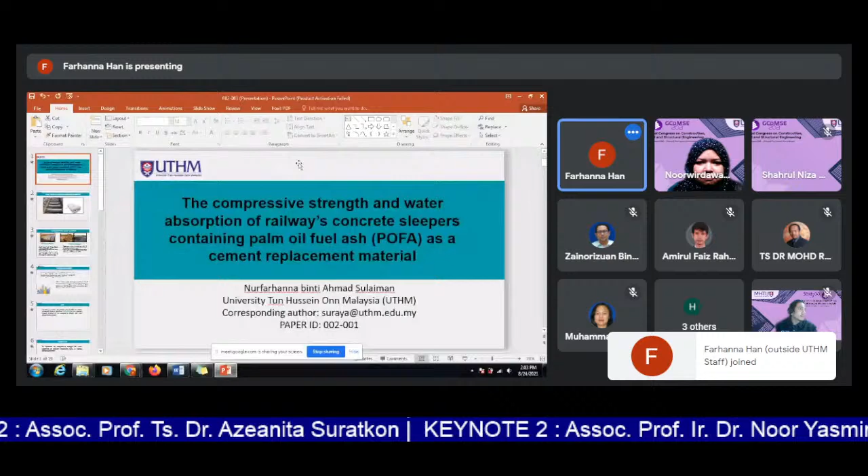Assalamualaikum and good evening, everyone. My name is Nur Farhana, I'm from UTHM, and my research title is the compressive strength and water absorption of railway concrete sleepers containing palm oil fuel ash (POFA) as a cement replacement material.

So basically, I will use palm oil waste, known as palm oil fuel ash, to produce railway concrete sleepers, and then test its performance in terms of compressive strength and water absorption.

First, let me introduce you to railway concrete sleepers. This is the transverse structure of a railway track. The function of the railway concrete sleeper is to distribute the load from the rail to the underlying layer.

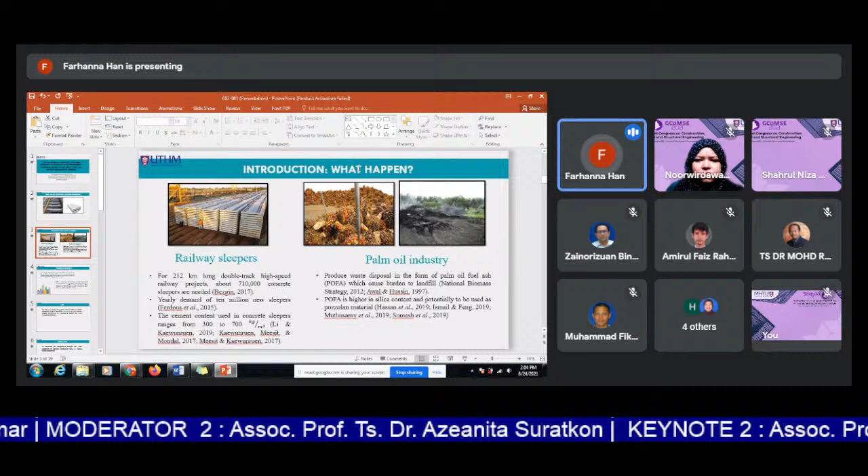As high-speed rail construction increases, demand for railway sleepers also increases. According to Bezgin in 2017, for a 212-kilometer long double-track high-speed railway project, about 710,000 concrete sleepers are needed, with a yearly demand of 10 million new sleepers.

Since railway sleepers require high strength concrete, a high content of cement is needed, ranging from 300 to 700 kg per m cube. This high cement consumption causes high CO2 emission, which can cause global warming, climate change, and other negative impacts to the environment.

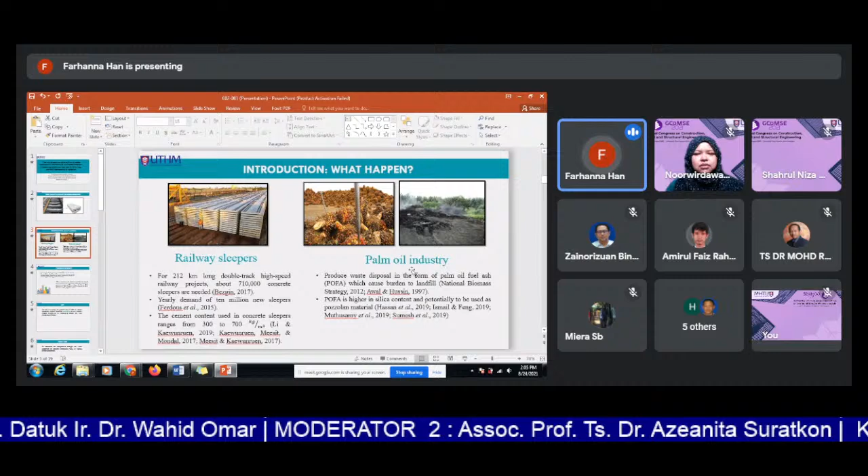Meanwhile, in the palm oil industry, in 2020 about 100 tons of palm oil fuel ash was produced and disposed to landfill. However, this POFA is high in silica content and has potential to be used as a pozzolan material. This is the problem statement for this research.

According to Kaewunruen, Sresakoolchai, and Peng in 2020, for Beijing-Shanghai high-speed rail construction, the greatest energy consumption was achieved by cement, representing about 42.69% of total energy, followed by gravel and steel bar.

POFA contains high silica content and can be used with cement to produce concrete. However, POFA cannot be used directly in raw form and requires further treatment such as grinding and heating to enhance its pozzolanic properties. The raw POFA collected directly from the factory may contain larger particle size and higher carbon content that can slow the pozzolanic reaction during hydration.

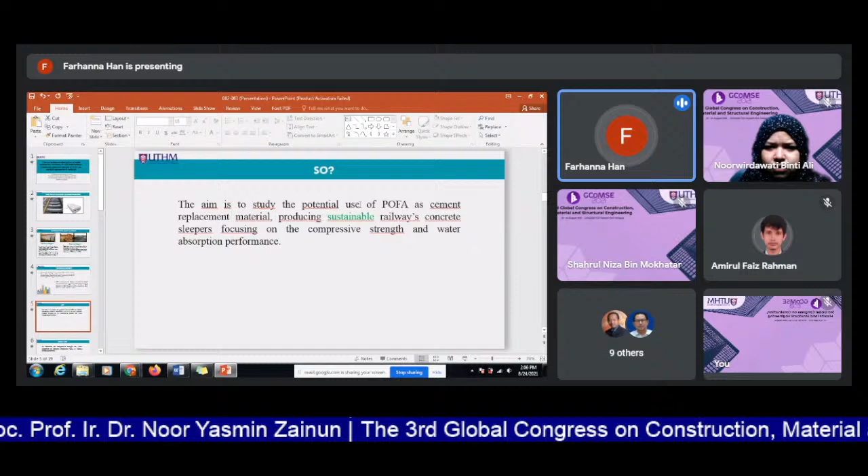The grinding process can reduce particle size and heating can lower the carbon content in POFA. The aim of my study is to study the potential use of POFA as a cement replacement material, producing sustainable railway concrete sleepers, focusing on compressive strength and water absorption performance.

The objective of my study is to determine the compressive strength and water absorption of concrete containing POFA at various percentage content.

This is the pozzolanic reaction of POFA. The major chemical component of OPC is calcium oxide, meanwhile POFA contains a large amount of silica content. During the hydration process, the silica in POFA reacts with the calcium hydroxide in cement to produce additional CSH, calcium silicate hydrate, improving the microstructure of the concrete and producing concrete with higher compressive strength.

This is the microstructure of the concrete: figure A is 0% POFA as control, without any POFA content, only plain concrete, and figure D is the concrete sample with 30% POFA. Both are after 28 days of curing age.

For figure A, the plain concrete, the CSH gel is difficult to retrieve, but for 30% POFA, the CSH gel is present in large amount, and the unreacted particles act as microfiller, filling voids and improving the microstructure of the concrete, producing a denser concrete, hence improving the compressive strength and water absorption of the concrete sample.

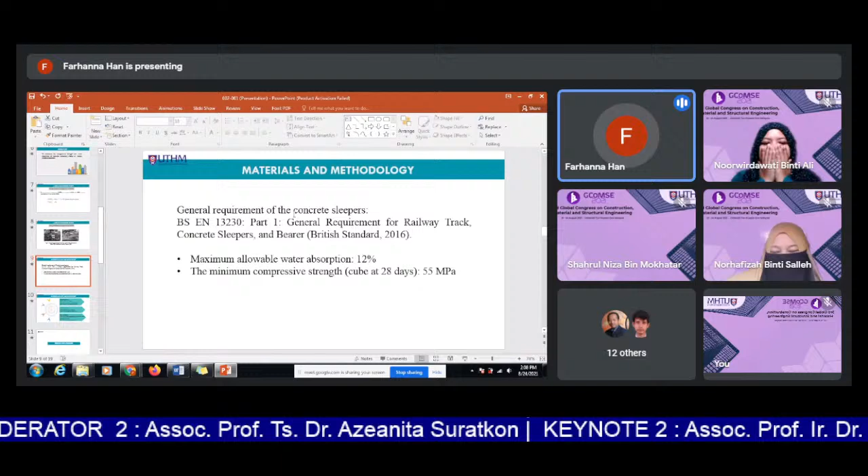For the general requirement of concrete sleepers, I refer to British Standard 13230, Part 1, general requirements for railway track concrete sleepers and bearer. The maximum allowable water absorption is 12%, and the minimum compressive strength for the cube at 28 days is 55 megapascal.

So this is my methodology. I prepared 3 mix designs using POFA as a cement replacement material at 0%, 20% and 40%. The control sample is 0%, without any POFA content.

For the POFA preparation, before use, I dry it in the oven at 105 degrees C for 24 hours, then sieve it to remove unwanted particles. For the water absorption test, I refer to British Standard 13230 and test water absorption using the hydrostatic weight method.

For the compressive strength test, I refer to British Standard 12390, and both tests are conducted at 7 and 28 days of curing age.

So this is my result and analysis. This is the result for the water absorption test versus the curing age at 7 and 28 days. We can see that as the curing age increases, the water absorption of the concrete sample reduces.

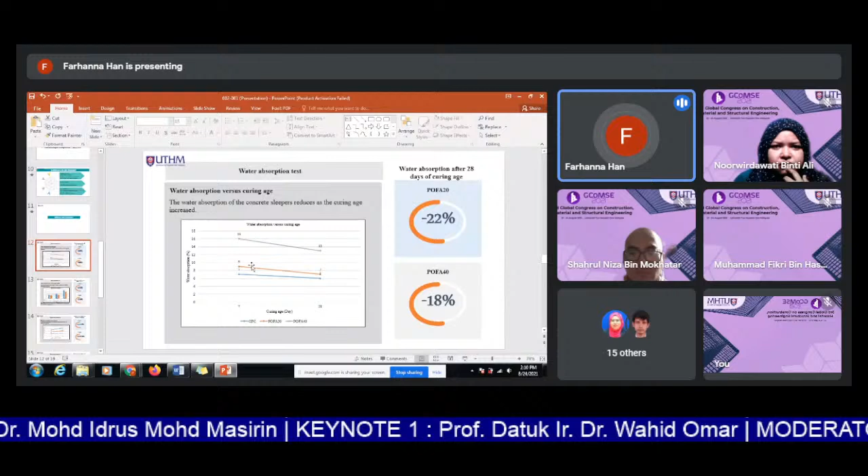For POFA 20, water absorption reduced by 22% from 7 to 28 days of curing age. For POFA 40, water absorption reduced by 18% from 7 to 28 days. This indicates that pozzolanic reaction occurs, which improves the microstructure of the sample along the curing age and fills the void, reducing the porosity of the concrete.

Although water absorption versus curing age reduced, as the percentage of POFA increases, the water absorption also increases. For 20% POFA, water absorption increased about 14%, and for POFA 40, water absorption increased by 54%. This may be due to the use of untreated POFA, which contains a higher amount of carbon and larger particles, which tend to absorb more water.

According to the British Standard, the maximum limit for water absorption is 12%. But since POFA 40 recorded a water absorption of 13%, POFA 40 cannot be used in railway operation. POFA 20 recorded a water absorption of 7%, so the optimum POFA content that can fulfill the water absorption requirement is 20%.

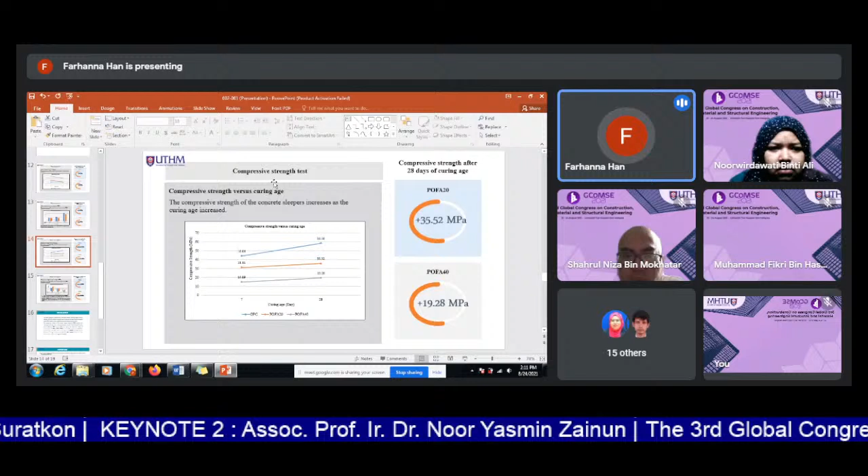Next, this is the result from the compressive strength test, the compressive strength versus curing age. As curing age increases, the compressive strength of the sample also increases.

For POFA 20, compressive strength increased by 35.52 megapascal from 7 to 28 days of curing age. For POFA 40, compressive strength improved by 19.28 megapascal along the curing age. This shows the pozzolanic reaction between POFA and cement along the curing age.

Although compressive strength improved along the curing age, as POFA content increased, the compressive strength of the sample reduced. Utilization of 20% POFA reduced the compressive strength by 22.72 megapascal compared to the control sample.

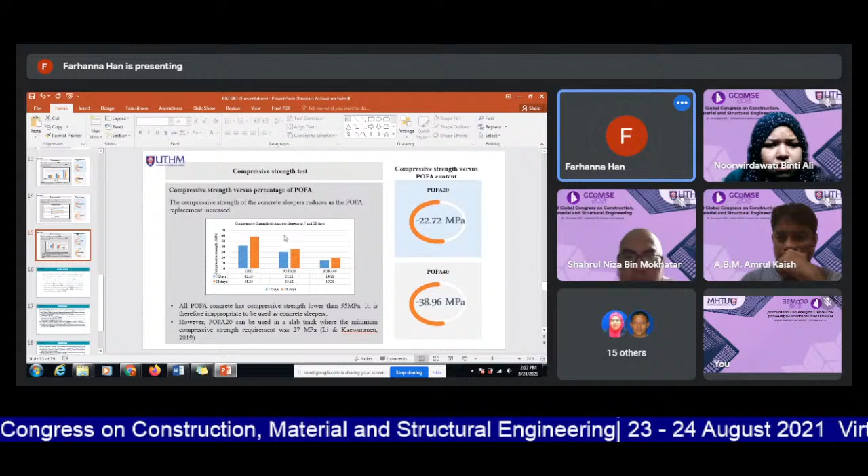For POFA 40, the compressive strength reduced by 38.96 megapascal compared to the control sample. This may be due to the use of untreated POFA, the higher amount of unburned carbon, and the larger particles of POFA, which reduce the pozzolanic reaction of the POFA.

All POFA concrete has compressive strength lower than 55 megapascal, so they cannot be used as concrete sleepers. However, POFA 20 recorded a compressive strength of 35.52 megapascal, so it can be used in slab track, where the minimum compressive strength required is 27 megapascal. So POFA 20 still can be used in railway track.

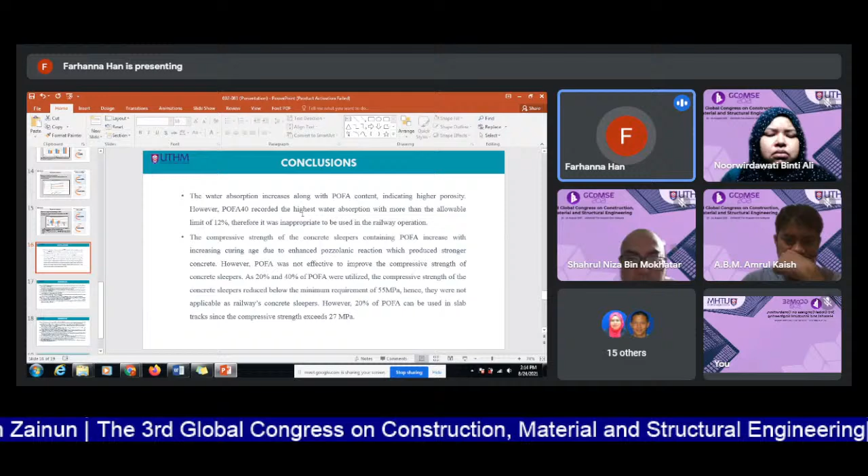As a conclusion, water absorption increased along with POFA content, indicating higher porosity. However, POFA 40 recorded the highest water absorption, more than the allowable limit of 12%, so it is not allowed to be used in railway operation. The compressive strength of concrete sleepers containing POFA increased with increasing curing age due to enhanced pozzolanic reaction, producing stronger concrete.

However, POFA was not effective in improving the compressive strength. The compressive strength reduced as the POFA content increased, but 20% of POFA can still be used as a slab track since its compressive strength is 27 megapascal.

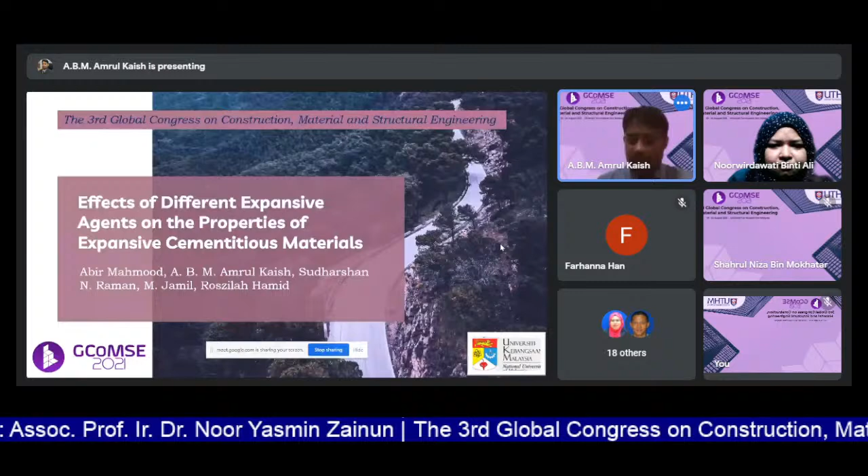So, expansive cementitious material - cement-based material, concrete, mortar, and other types - especially the early cracking, and also the aesthetic appearance for architectural concrete and all other types of concrete. So shrinkage is considered the major reason of curling, cracking, and debonding in such materials. The exposure to unsaturated environment by a cement-based system leads to drying shrinkage due to water evaporation. This causes early age shrinkage in the concrete structure, which also affects the properties of the concrete.

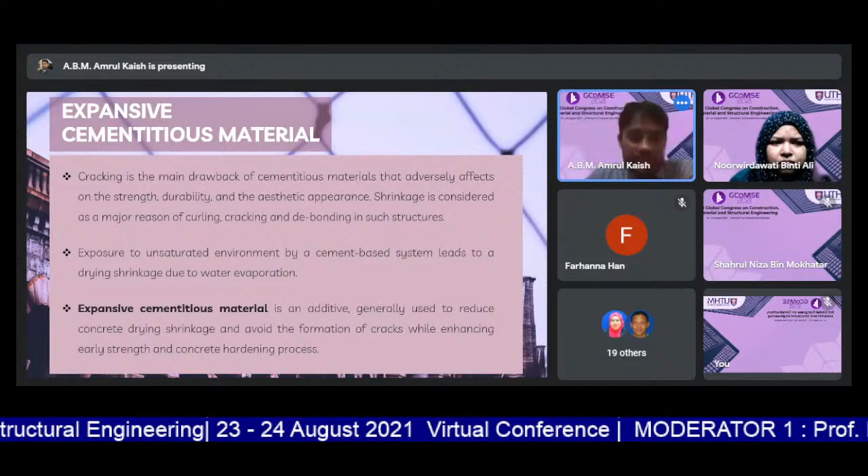So the expansive cementitious material is basically an additive that people normally use to compensate, reduce the drying shrinkage of the concrete, and also avoid the formation of cracking while enhancing the early strength and the concrete harden process. Okay, this is the principle - I don't want to go through the principle in detail. So what I just want to say is the use of expansive agent, but definitely it should be a controlled expansive agent, so it causes a little bit of expansion to compensate the early age shrinkage, like the drying shrinkage because of the evaporation of the concrete.

Okay, so basically in the market we have three types of expansive agents. The first one is calcium oxide based, magnesium oxide based, and also sulphoaluminate based type expansive agent.

So calcium oxide based expansive agent contains dead burnt calcium granules, which is actually calcium oxide. And the effect of this material is when it comes into contact with water, it creates calcium hydroxide, which is the portlandite crystal, and causes a little bit of expansion based on the doses. This one is commercially available, and the ACI 223 committee report also confirmed this type of expansive agent, which is actually Type G according to the ACI report.

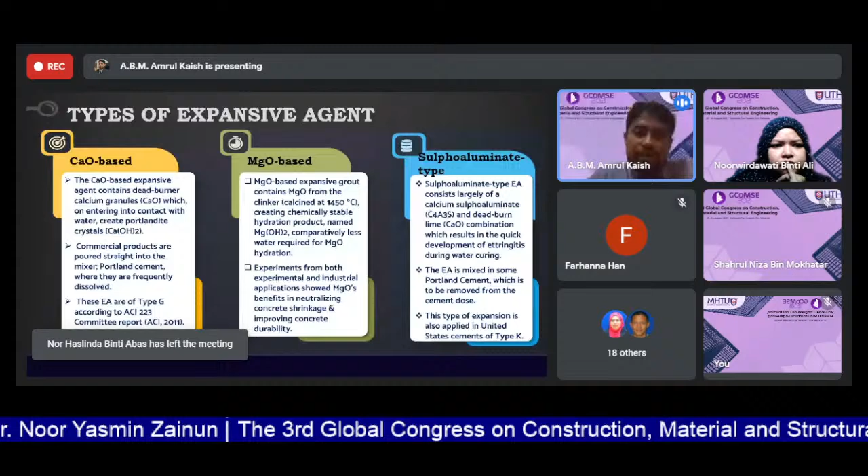Okay, then we have magnesium oxide from the clinker, which is calcined at 1450 degrees Celsius, creating the chemically stable hydration product, which is magnesium hydroxide. This one requires comparatively less water compared to calcium oxide based expansive agents.

The third and last one is the sulphoaluminate type. This one basically contains calcium sulphoaluminate and also lime, which is calcium oxide also. This combination results in the quick development of ettringite during water curing. So this type of expansive agent is mixed in some Portland cement, which is actually known as expansive cement, and also high early strength cement. This type of expansive cement is available in the US as well, and also in Europe.

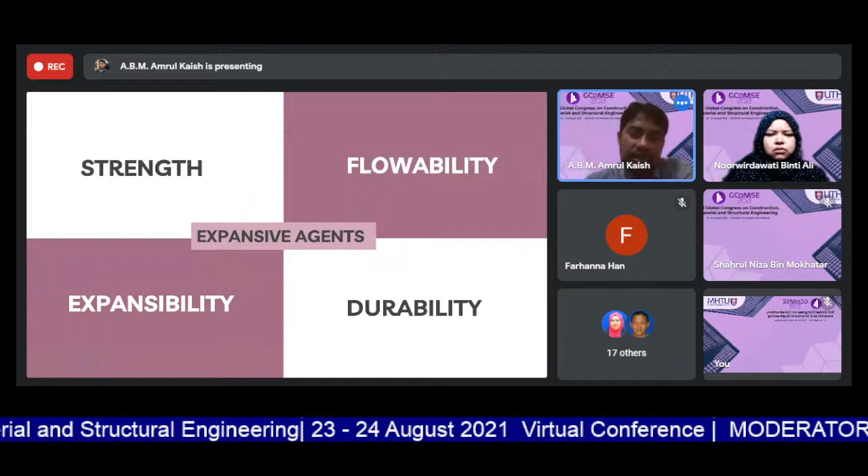Okay, basically I'm going to discuss these four types of effects of expansive agent in cementitious material, especially concrete and mortar. So let's start with the strength. For the calcium oxide based EA, which is expansive agent, a research study by some researchers from Italy identified that different amounts of calcium oxide based expansive agent don't have that much influence on the compressive strength value.

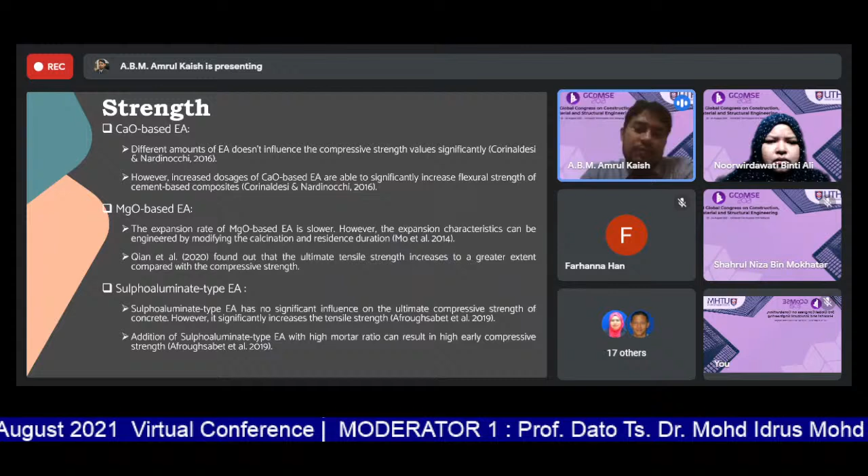However, increased doses of calcium oxide based EA are able to significantly increase the flexural strength of cement based composites, meaning fiber reinforced composites. There is almost no significant influence on compressive strength, but a significant increase in flexural strength. This is because of the partial pre-stressing effect due to the expansion in the microfibers. This is how the flexural strength of the cementitious composite increases due to the blending of expansive agents.

Then magnesium oxide based EA - the expansion rate of the magnesium oxide based EA is slower actually. However, the expansion characteristics can be engineered by modifying the calcination and residence duration. Another study found that the ultimate tensile strength increase is greater compared with the compressive strength. This is also due to the partial pre-stressing effect of the microfibers.

Then the sulfoaluminate based EA - this one has no significant influence on the ultimate compressive strength, but it has significant strength on the tensile strength, and also it results in a high early compressive strength if we use it with a high mortar ratio in the cementitious composites.

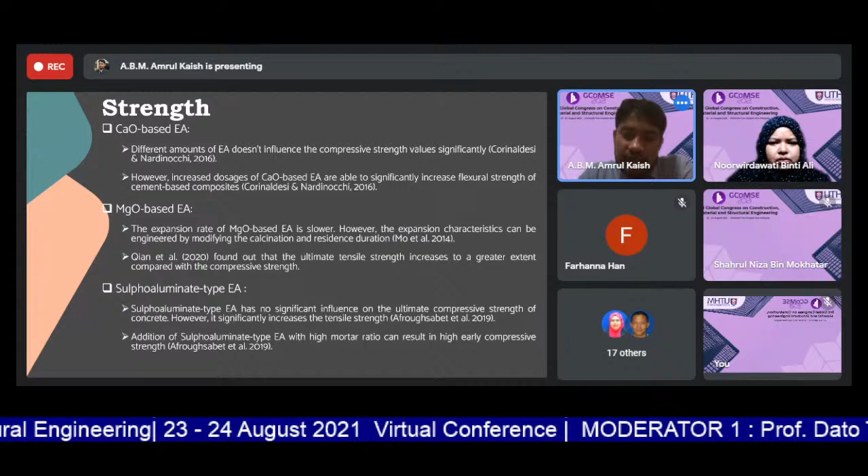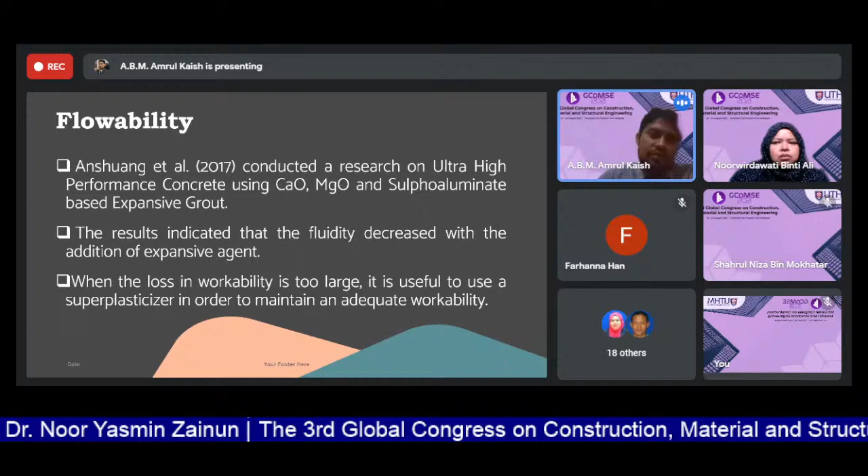Then with the flowability, all three types of expansive agent have an impact on the flowability. The result from one researcher indicated that fluidity decreases with the addition of expansive agent, because the expansive agent tries to expand and causes a decrease in fluidity. This is why the workability is reduced significantly. So it is advised to use superplasticizer when we use any kind of expansive agent, to create a balance between the flowability and expansibility.

In terms of expansibility, overall calcium oxide based expansive agent and magnesium oxide based expansive agent have very high expansibility compared to the sulfoaluminate type. So sulfoaluminate based expansive agent actually produces controlled expansion in concrete structures. Most researchers recommend using this type of expansive agent for controlled expansion.

And for durability, one study found that reinforced concrete with steel fiber and calcium oxide based expansive agent provided better improvement in the impermeability and durability of the concrete. According to Jiang et al., the use of magnesium oxide alone had little effect on the resistance to chloride penetration of the concrete. The combined effect of magnesium oxide and steel fibers was studied. Also, the use of calcium oxide based EA in hydraulic structures is less likely used in practice due to the lack of enough research.

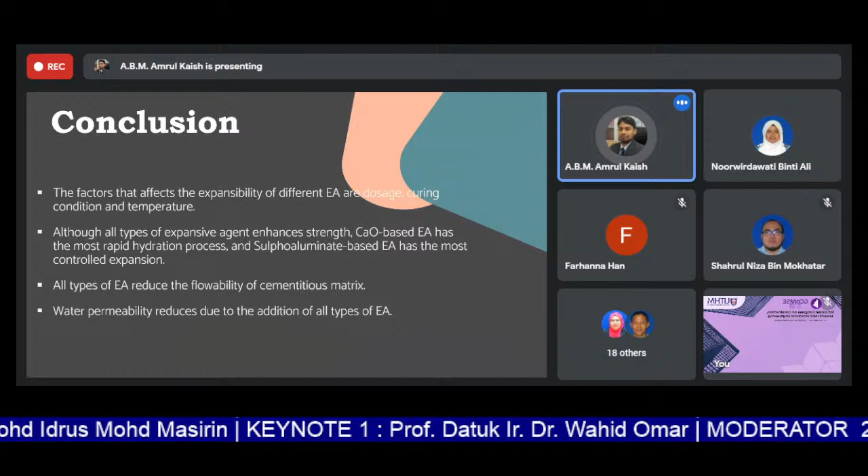In conclusion, the factors that affect the expansibility of different expansive agents are dose, curing condition, and temperature. Although all types of expansive agent enhance strength, calcium oxide based EA has the most rapid hydration process, and sulfoaluminate based EA has the most controlled expansion. So for high early strength, we can recommend calcium oxide based EA.

However, for controlled expansion, which is required for practical use in structures, we should go for sulfoaluminate based EA. All types of EA reduce the flowability of the cementitious matrix, so it is advised to use superplasticizer to compensate for this workability problem. Also, water permeability is reduced due to the addition of almost all types of EA, which is reported in the literature.

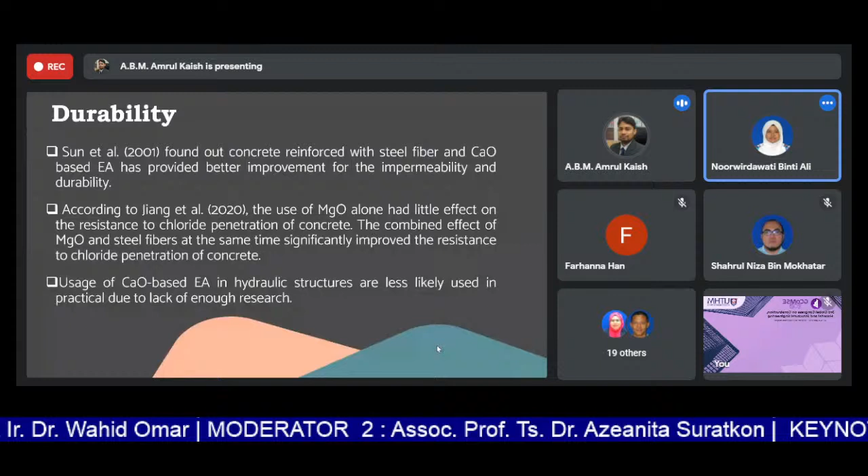Thank you for this question. Basically, the effect of fiber is different than the effect of any other additives. Fiber normally does not significantly affect the durability. However, additives significantly improve the durability. So what happened in this study was that magnesium oxide causes a little bit of expansion that reduces the porosity of the concrete, and this is why durability is affected, not because of the steel fiber.

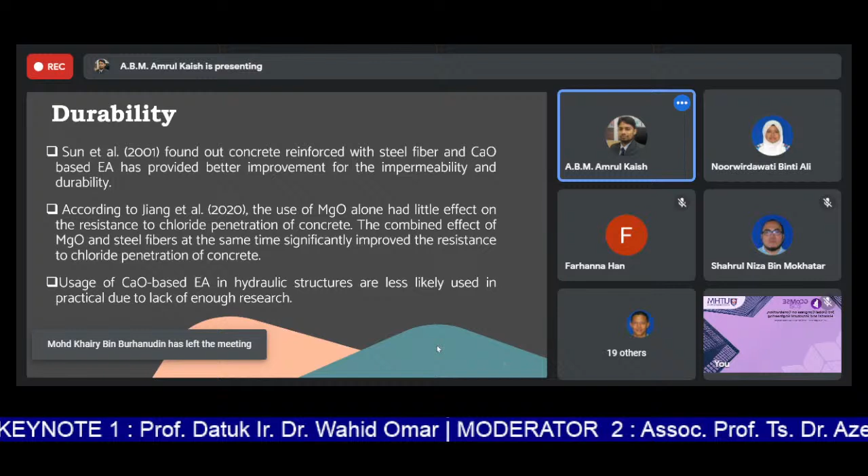But what is the effect of steel fiber here? Because magnesium oxide is causing an expansion, and magnesium oxide normally does not cause a controlled expansion, the steel fiber is there to control the rate of the expansion.

So it reduces, because of the expansion there will be no cracking due to the steel fiber. This is what steel fiber is doing here. But magnesium oxide causes the improvement in the porosity, and that is how the chloride ion penetration, and also any other ion penetration, will be reduced. So this is my explanation. I hope that's an okay answer to your question.

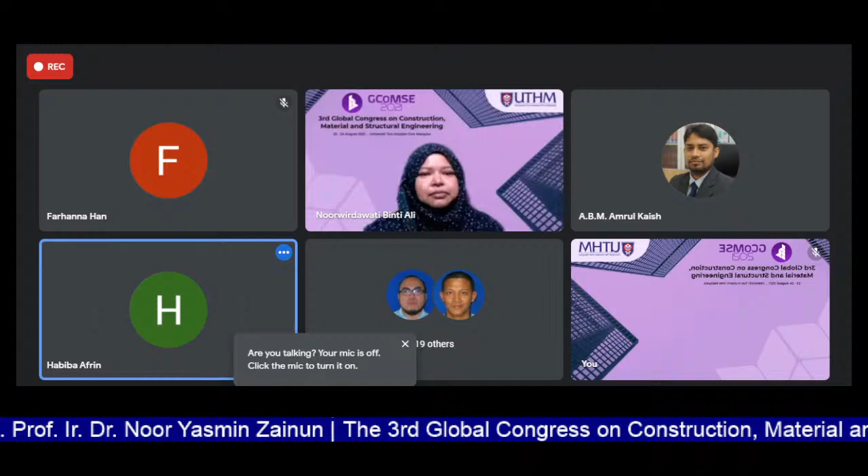Hello everyone. Today I'm presenting about an overview of eco-friendly alternatives as a replacement of cement in concrete. I'm Habiba Afrin, from Macquarie University, Sydney, Australia. So all of us need to know about concrete. Concrete is basically a mixture of fine aggregate...

Habiba, excuse me, have you opened your slides yet? Yeah, can you see my slide? No, we don't see it. Okay sorry. Maybe you can share your screen instead of windows. Yeah okay, it's okay now. Okay, thank you.

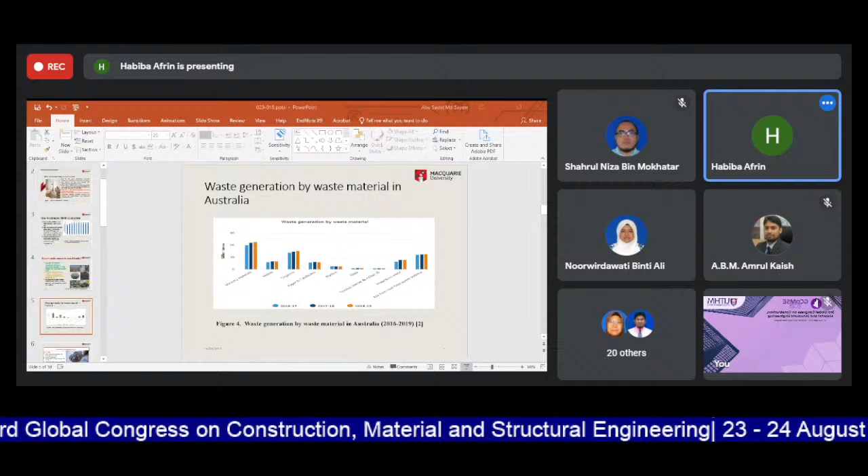Sorry. So for construction and demolition waste, we can use wood, steel, concrete, gypsum, masonry, plaster, metal, and asphalt as well. These are generated in large amounts each year, and it's increasing nowadays. You can see coal fired power stations generate much higher rates than others, so it was pretty much used in concrete.

First, I will discuss fly ash. It's the waste material that comes from coal burning power plants, also known as ashcrete. In experiments, we found it can reduce cement use by 20% and water use by 10%. It also impacts bleeding, strength, and reduces shrinkage. But another problem with using fly ash is it has a wide variety of chemical compositions from different sources, so sometimes it affects the product quality.

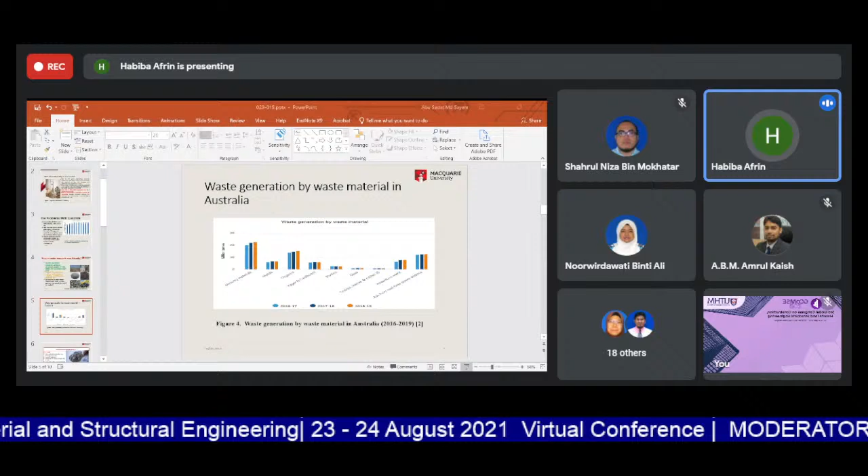Excuse me, I think the slide is not moving. Seriously, it's not moving? I can see it moving, but I don't know.

Slide number. Now, can you see my slide is moving now? Hello? Yes, we can see the slide, but the slide is not moving. Just stay at page 2. Previously at page 2. But I am moving the full slide, I don't know what's the problem with it. You use two screens, isn't it? Yeah, I'm moving it manually, but it still is not. When you share the screen, you should choose your entire screen, not a window.

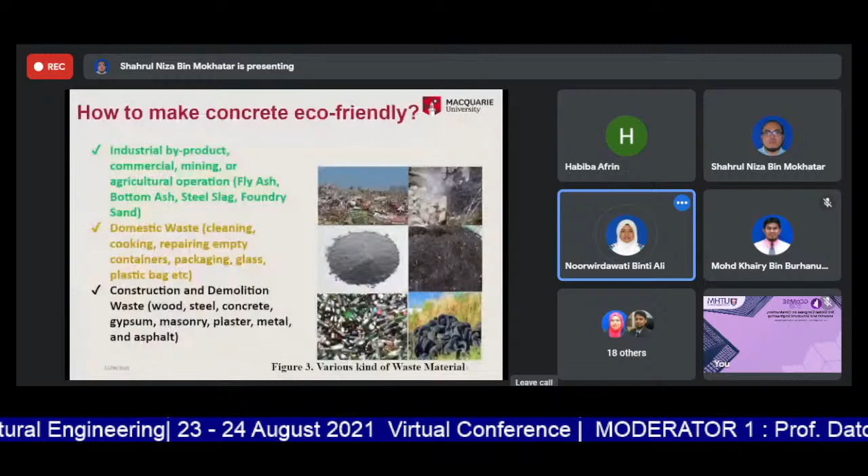Window. Can I help you to share the screen? Yeah, sure. I'm just sharing, but... I'm just going from the sharing screen to the window. Then I'm just tapping because it has only the window only. So this is your screen now. Okay. Hmm. Okay, so which slide? Yeah, I was doing. Can I take the control or no? I can control. Okay, I was in the silica fume.

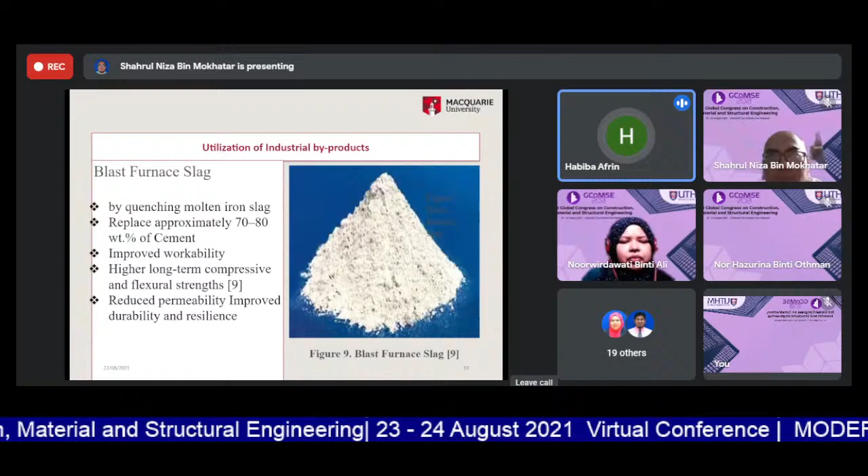Can you move to the next slide? If you look at blast furnace slag, this is another waste product that comes from industrial byproducts, often known as granulated blast furnace slag, and it can replace 70 to 80% of the cement, sometimes 100% as well. It has improved workability, higher long-term compressive and flexural strength, reduced permeability, and improved durability and resilience. This is another one.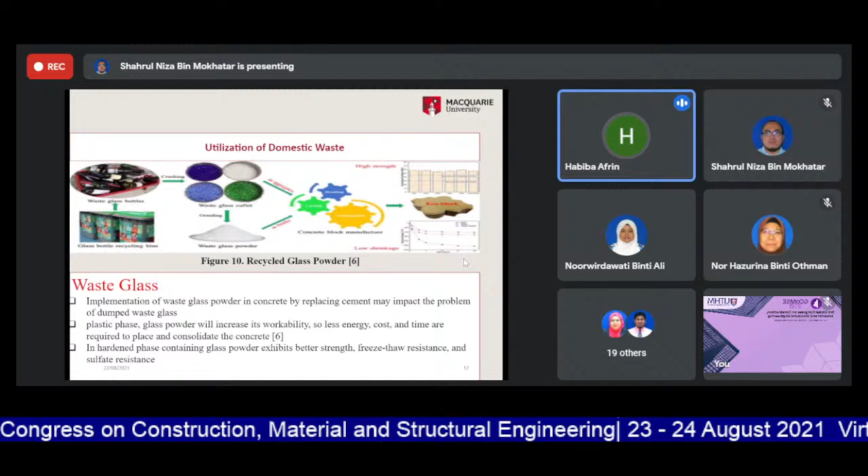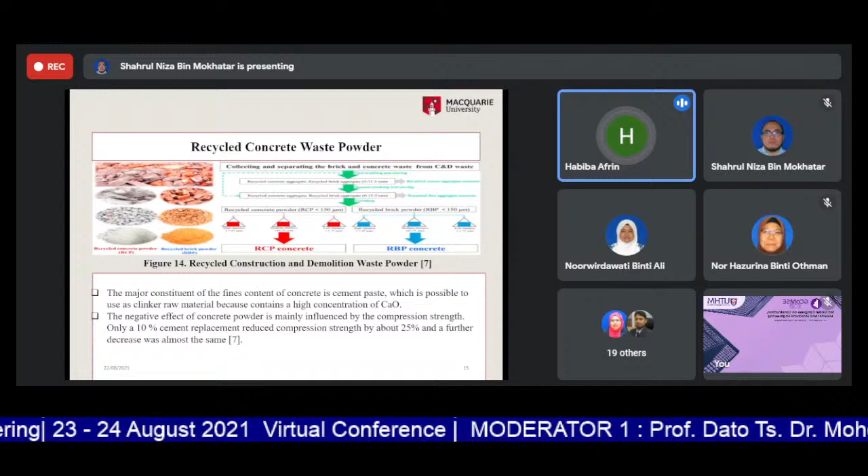We can use concrete powder and brick powder as a replacement of cement. The major constituent of the fines content of concrete in cement paste, which is possible to use as a clinker raw material because it contains a high concentration of CaO. The negative effect of concrete powder mainly influences the compression strength. Only a 10% cement replacement reduced the compression strength by about 25%, and a further decrease was almost the same.

In conclusion, a potential way of achieving sustainability is by replacing as much Portland cement as possible with supplementary cementitious materials, especially those that are byproducts of industrial processes such as fly ash, granulated blast furnace slag, and silica fume. Using recycled materials to replace natural resources, improving concrete's mechanical and other properties can reduce the amount of concrete needed. Improving the durability and service life of concrete reduces the amount needed for replacement. Thank you.

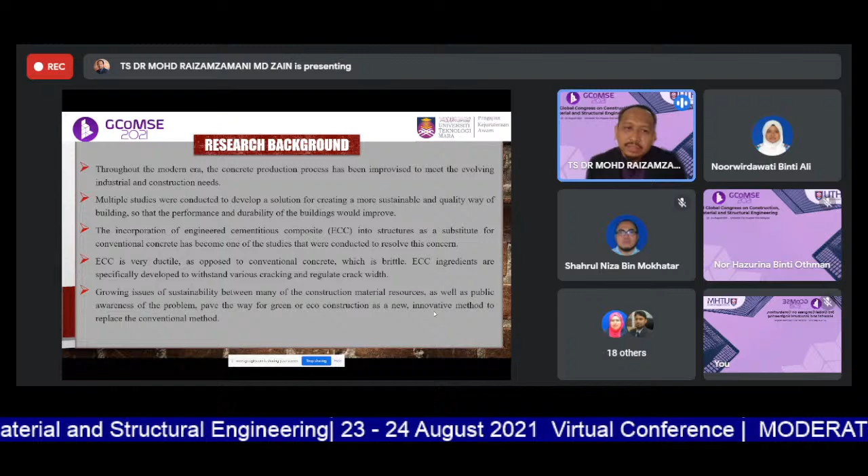As we know, throughout the modern era the concrete production process has been improvised to meet evolving industry and construction needs. Multiple studies were conducted to develop solutions for creating more sustainable and quality ways of building, so that the characteristics, performance, and durability of buildings would improve.

The incorporation of ECC, engineered cementitious composite, into structures as a substitute for conventional concrete has become one of the studies conducted to resolve these concerns. ECC is very ductile as opposed to conventional concrete, which is brittle, and its ingredients are specially developed to withstand various cracking and regulate crack width.

Growing issues of sustainability among construction material resources, as well as public awareness of the problem, paved the way for green or eco-construction as an innovative method to replace conventional methods. Among the alternative solutions are using supplementary cementitious material, which we call SCM, recycled concrete aggregate, RCF, and many other industrial wastes.

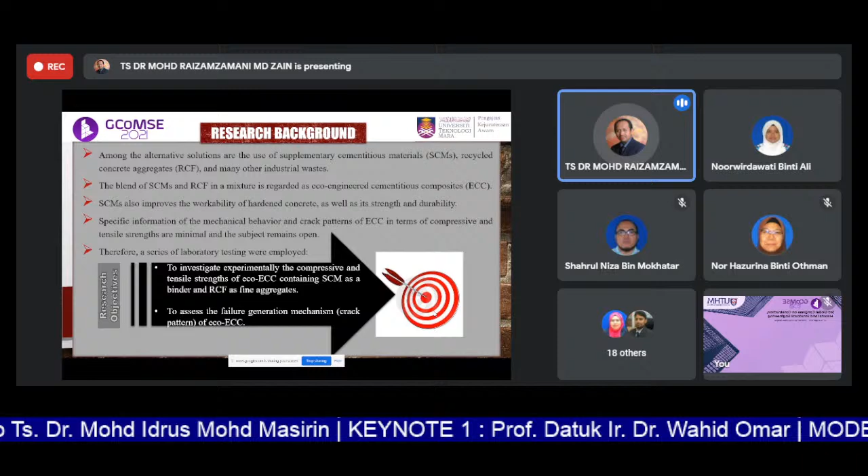The blend of SCM and RCF in a mixture can be regarded as the eco-engineered cementitious composite. SCM can also improve the workability of the hardened concrete as well as its strength and durability. Specific information on the mechanical behaviors and crack patterns of ECC in terms of compressive and tensile strength is minimal and the subject remains open.

Therefore, a series of laboratory testing was employed to investigate two objectives: first, to experimentally investigate the compressive and tensile strength of eco-ECC containing SCM as a binder and RCF as a fine aggregate; and second, to assess the failure generation mechanism, focusing on the crack patterns of the eco-ECC.

So now let's look at the experimental program, first the materials and mixture proportions.

The raw materials used in the concrete were, as you can see here: cement, OPC, RCF, water, GGBS or fly ash, polypropylene fibers, and also the superplasticizer SP.

The RCF employed in ECC was taken from the demolished building, which acts as a fine aggregate replacement, and it was crushed and sieved to a size of below 600 micrometers.

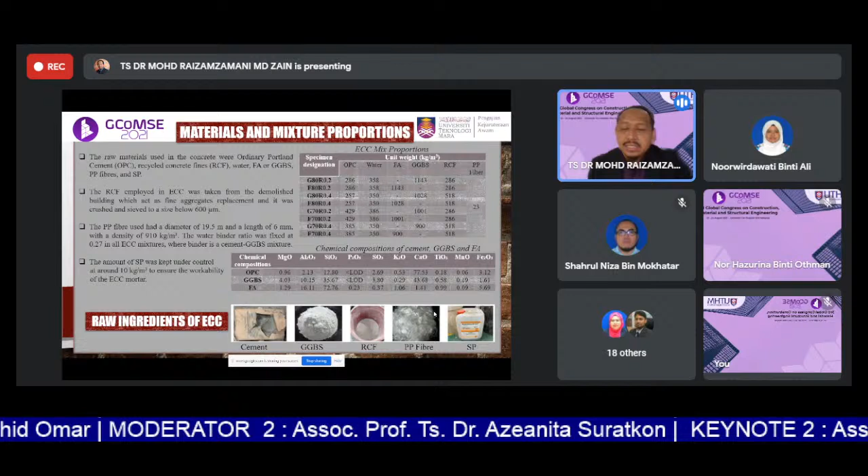The PP fibers used had a diameter of 19.5 micrometers and a length of 6 millimeters, with a density of 910 kilogram per meter cube.

The water binder ratio was fixed at 0.27 in all the ECC mixtures, where the binder is a combination of cement and GGBS mixtures. The amount of SP was kept under control at around 10 kilogram per meter cube to ensure the workability of the ECC mortar.

So if you can look at the tables here, we have the ECC mix proportions. There are 8 numbers of specimens, and these are the proportions.

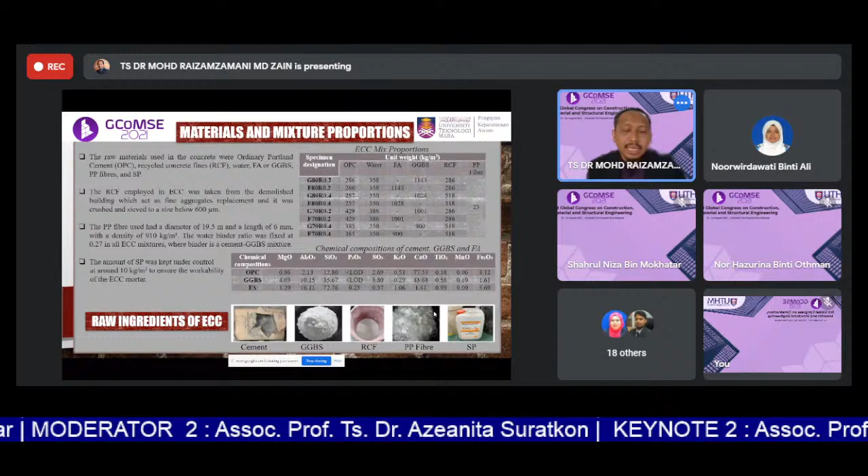And then you can look at here, there are tables on the chemical compositions of cement, GGBS, and we also have the fly ash. These are the elemental, chemical compositions for OPC and GGBS. We can look at here that the highest amount is on the calcareous materials, and then for the fly ash, the highest is on the siliceous materials. So these are the chemical compositions of cement, fly ash, and GGBS.

So now let's look at the detail of the test specimen. There are 2 types of tests being carried out: compressive and also the direct tensile test.

Under compressive load test, there are 5 cylindrical ECC samples of 50 millimeters in diameter and 100 millimeter in height from each mix, along with 5 cylindrical normal concretes, were cast and tested up to failure at 7 days and 28 days of compressive strength. During the test, ECC specimen was loaded at a constant rate of 0.5 millimeter per minute.

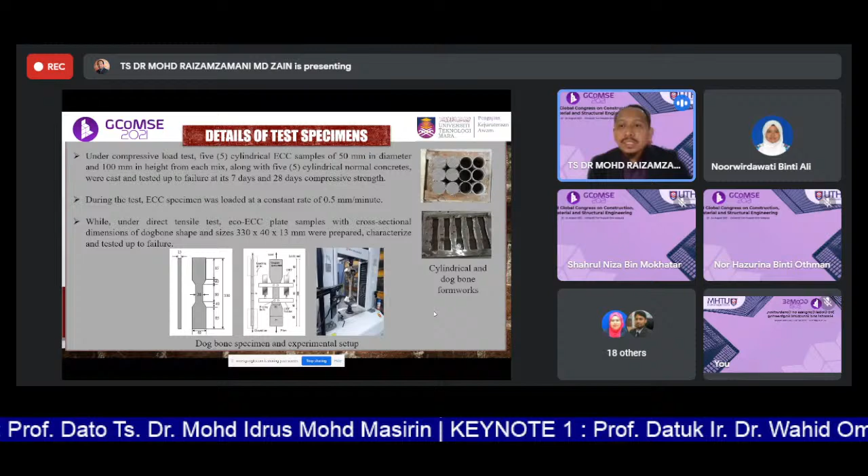So you can look at here, these are the cylindrical and dog bone formworks.

And then while under direct tensile test, the ECC plate sample with cross-sectional dimensions of dog bone shape and sizes 330 times 40 times 13 millimeter were prepared, characterized, cast, and tested up to failure.

So if you can look at the figures here, this shows the dog bone specimen and also the experimental setup for the samples.

Now come to the results and discussions.

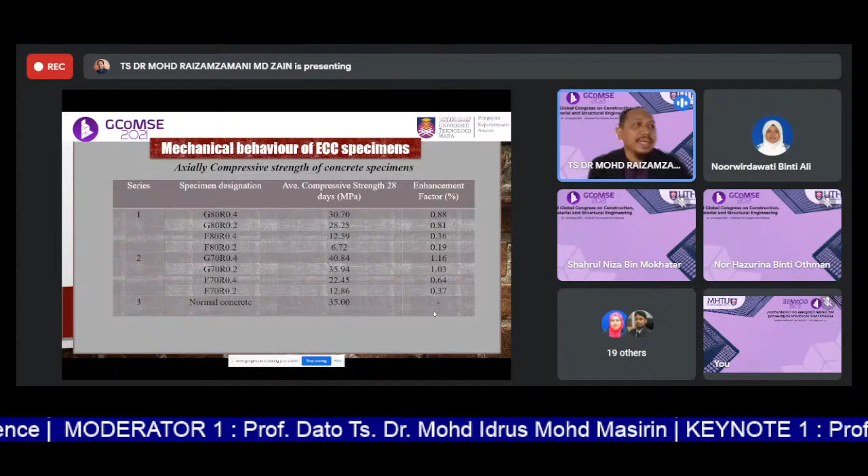Now let's look at the axially compressive strength of the concrete specimens. There are 3 types of series of concrete mixture designed and prepared, and among the 3 series, series 1 and series 2 were created to investigate the effects of different variations of GGBS and also RCF. There are 4 cement-GGBS and cement-fly ash combinations investigated.

If you can look at here, look at the specimen designations. For example, G80R0.4 indicates that the mixture contains around 80% of GGBS, and 0.4 indicates 0.4% RCF.

So these are the results of the average compressive strength at 28 days. The results show that the use of 70% GGBS replacement of cement with PP fiber in ECC specimen enhanced the compressive strength of ECC specimen by 1.03 and 1.16 times respectively, when compared to the normal concretes.

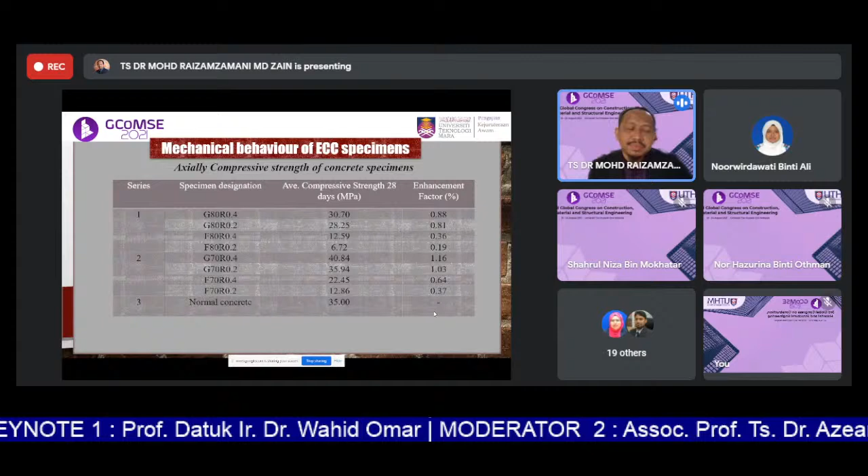The increment could be attributed to the use of eco material like GGBS and the addition of fibers such as PP fibers, which have been shown to improve the microstructure of the concretes. The addition of GGBS to ECC concrete improves its mechanical properties, and because of the higher workability of the GGBS, ECC mixture bonds well, improving the compressive strength. The action of fibers also contributed to the higher compressive strength obtained by the ECC mixtures.

So these are the outcomes for the compressive strength of the concrete specimens. So next, let's look at the direct tensile test.

These 2 figures show the tensile strength displacement curve. For example, if you look at the first figure, it indicates the tensile strength or displacement curve between 70% and 80% of the GGBS and fly ash replacement for 0.2% RCF.

The second figure denotes the tensile strength or displacement curve between 70% and 80% of GGBS and fly ash replacement for 0.4 RCF. Looking at the first figure, GGBS cement combinations, for example G70 0.2, have higher tensile strength values of around 5.26 MPa compared to fly ash cement combinations F70 0.2, and also normal concrete, which has the lowest values of 2.47 MPa and 3.33 MPa respectively.

This demonstrates that the tensile strength of mixtures containing 0.2% RCF with 70% GGBS cement combinations is greater than the tensile strength of mixtures containing 70% fly ash cement combinations, and also the normal concrete.

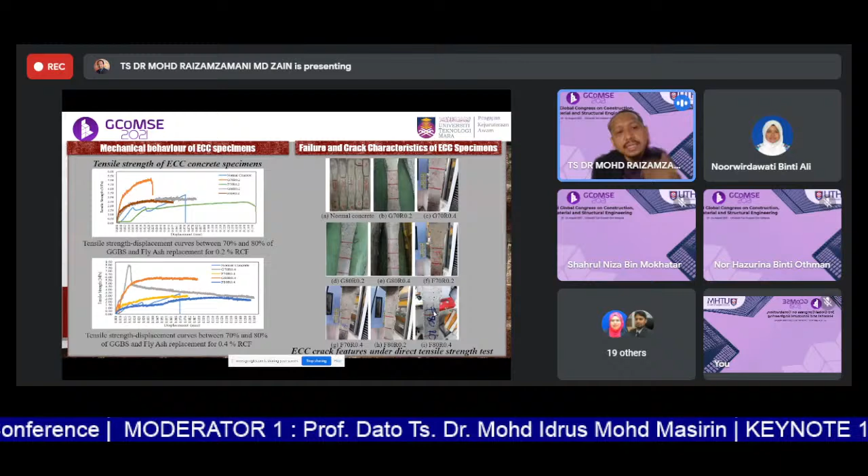Looking at the second figure, it indicates that GGBS cement combinations for G70 0.4 have higher tensile strength values of around 8 MPa compared to fly ash cement combinations and normal concrete. This shows that the tensile strength of mixtures containing 0.4% RCF with 70% GGBS cement combinations is significantly greater than the tensile strength of mixtures containing 70% fly ash cement combinations and the normal concrete.

Now let me explain the failure generation mechanisms of the ECC specimen. This figure shows the ECC crack features under the direct tensile strength test. As you can see, it is in the shape of a dog bone. The dog bone shaped specimen is used to regulate the location of cracking, to ensure that cracking occurs in the middle section of the specimen.

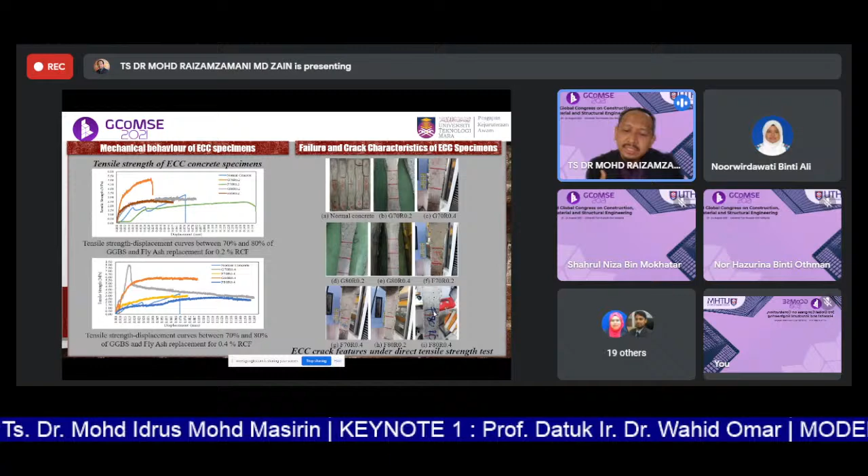Some might ask why it has to be in a dog bone shape. The shape is in the form of a dog bone due to stress concentrations at the narrow necks, which yields a more accurate result. The pure tension occurs at the narrow neck area. So when the sample is loaded with tensile force, the shoulders, being wider than the gauge sections, cause a stress concentration in the middle.

These stress concentrations increase the likelihood of the sample rupturing away from the ends. This indicates that cracking during the tensile strength test was mostly observed in the middle of the dog bone specimen. However, we can also observe cracks at one-third from the middle sections of the specimen.

Now let's look at the conclusions. Based on the experimental studies, the inclusion of 70% GGBS in the ECC concrete specimen improves its compressive strength performance compared to normal concrete. The greater workability of GGBS allows the ECC mixture to bond well, thus boosting the compressive strength.

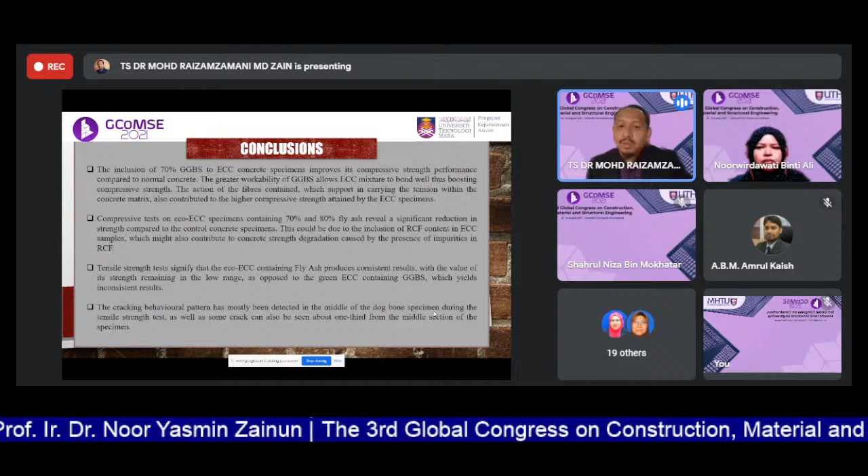Compressive tests on eco ECC specimens containing 70% and 80% fly ash reveal significant reductions compared to normal concrete. This could be due to the inclusion of RCF content in the ECC sample, which might also contribute to concrete strength degradation caused by the presence of impurities in RCF.

The tensile strength test signifies that eco ECC containing fly ash produces a consistent result, with its strength values remaining in the low range, as opposed to the green ECC containing GGBS, which yields inconsistent results. The cracking behavioral pattern has mostly been detected, as I said before, in the middle of the dog bone specimen during the tensile strength test, with some cracks also seen about one-third from the middle sections of the specimens.

So, with that, thank you for listening.

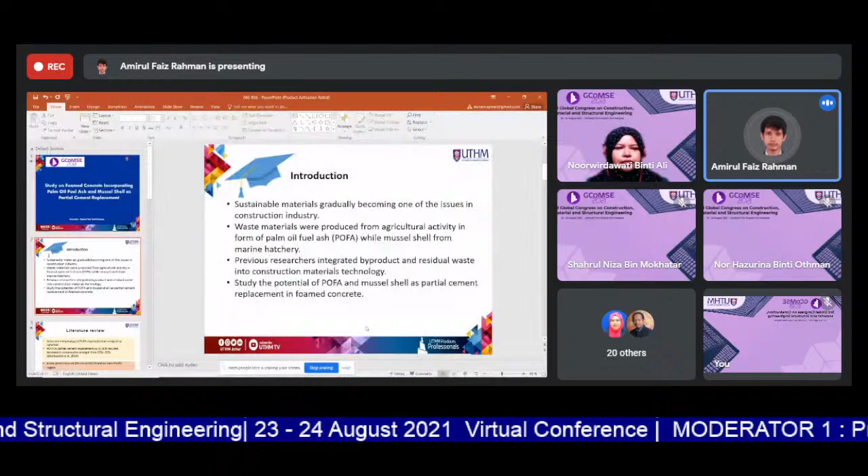Assalamualaikum warahmatullahi wabarakatuh. Firstly, can you verify, Doctor, if you hear my voice and see my slides? Yeah, we can hear your voice and see the slide. Full screen? Yeah, it's full screen right now. Okay, let me begin.

I'm Amirul Faiz Abdul Rahman from UTHM. Today I'm going to present a study on foam concrete incorporating POFA and mussel shell as partial cement replacement.

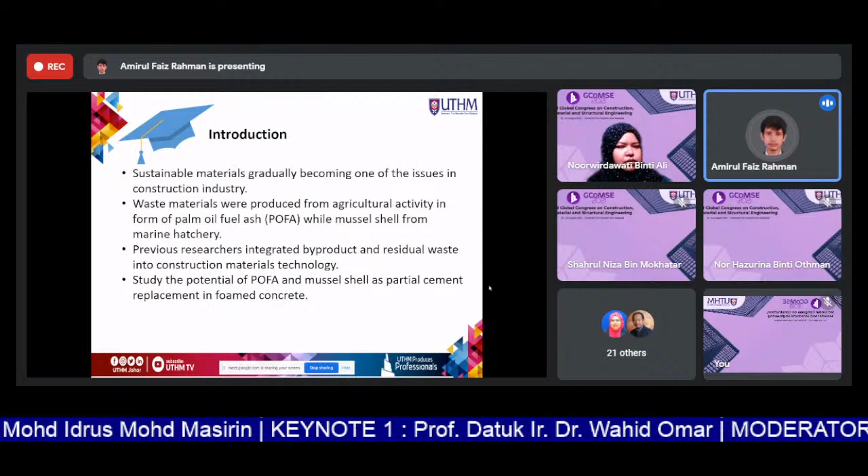For introduction, the issue of construction today focuses on sustainable material. This is mainly due to the rapid development of concrete to build residential and commercial buildings, which uses heavily natural resources. On the other hand, waste materials were produced from agricultural activity in the form of palm oil fuel ash, which is the main agricultural activity in our country, and next the mussel shell from marine hatcheries along the coastal area in peninsular Malaysia. A previous study integrated the byproduct and this residual waste into materials technology.

However, there is a lack of study on the potential combination of the byproducts as cement replacement in foam concrete.

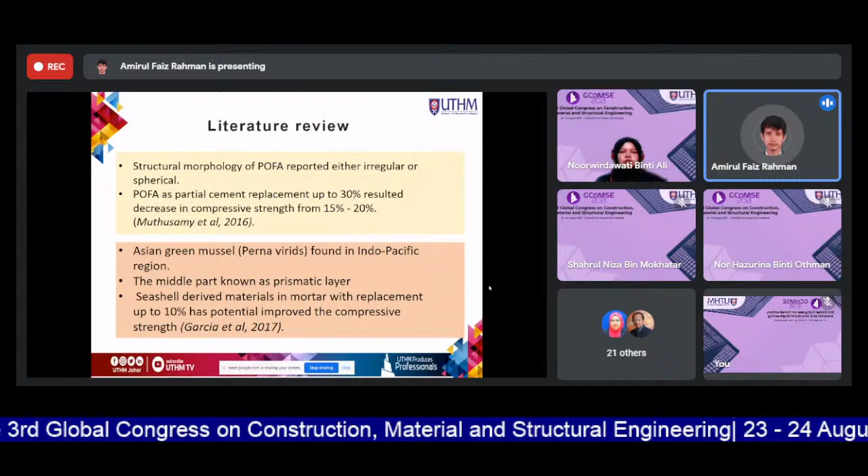Previous study used seashell waste in mortar with replacement up to 10%, improving the compressive strength up to 10%. Again, for this study, the cement replacement materials consist of POFA and mussel shell.

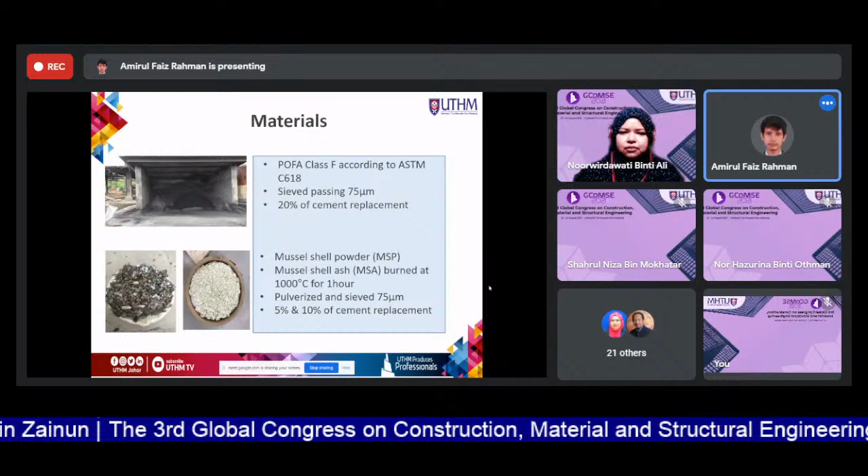For this study, the POFA is classified as class F and prepared to achieve 75 micron, used fixed at 20% of cement replacement. However, the mussel shell was prepared in two different forms: one as mussel shell powder, and the other as mussel shell ash, which is burned at 1000 degrees Celsius for 1 hour. After the mussel shell is prepared, it will be used at 5% and 10%, combined with the 20% of POFA.

For the methodology, the foam concrete was designed with a weight density of 1,800 kg per meter cube, and the material composition consists of 1 part cement and 2 parts fine aggregate, with a water cement ratio of 0.55. For the foaming agent, I'm using Sika AER 5050 with a ratio of 1:20, using the pre-foaming method.

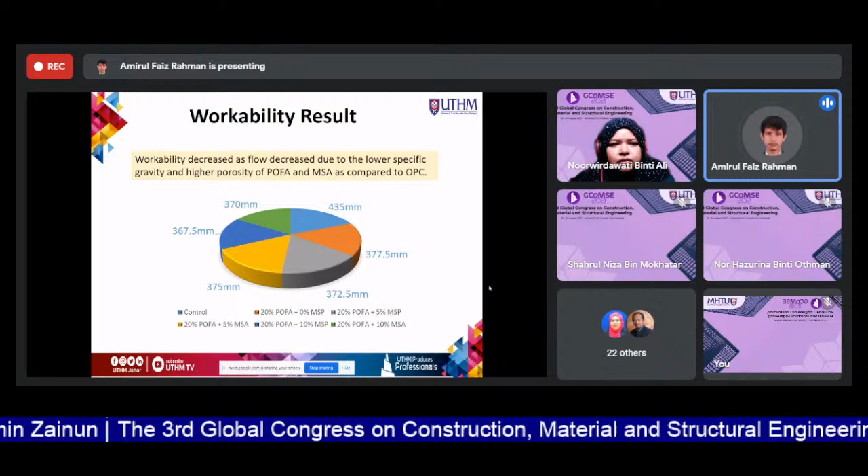Next, for the results: the workability test used the J-ring test with the inverted slump method. The results show that an increase in cement replacement material will reduce the workability of the samples. The workability decreased due to lower specific gravity and higher porosity of POFA and MSA compared to OPC, with the reduction ranging from 15% to 16%.

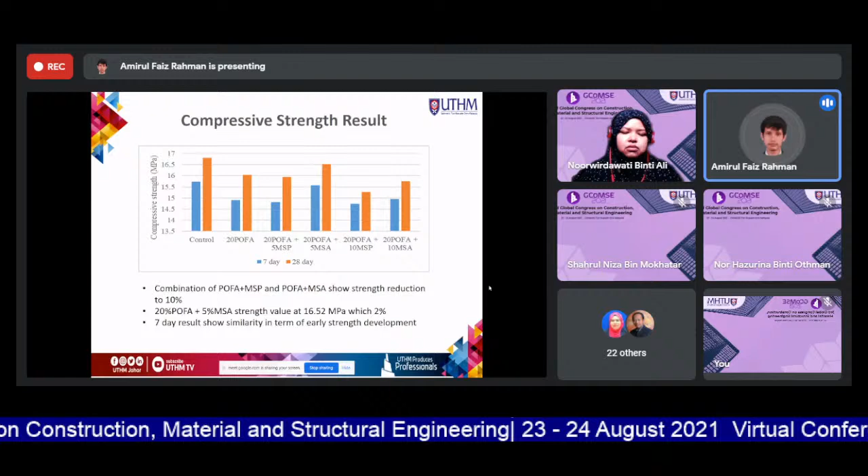And we can see that there are differences in strength value between the mussel shell powder, which is not burnt, and the mussel shell ash.

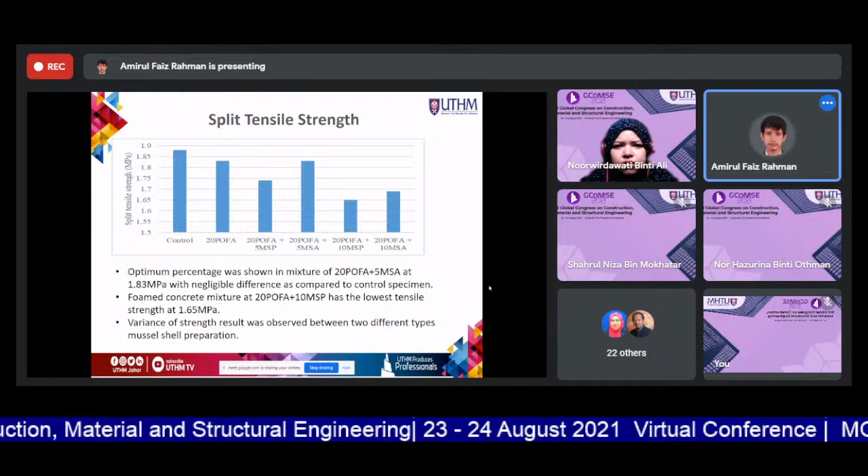And then the variance of strength result was observed between two different types of mussel shell preparation, similar with the compressive strength result.

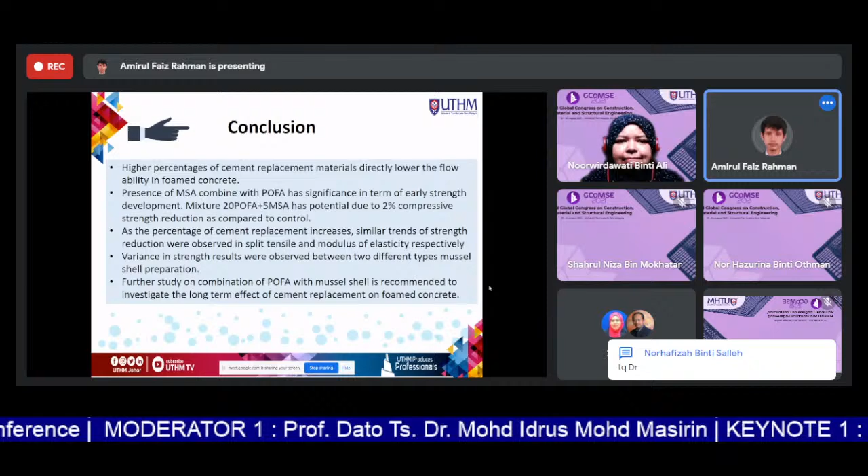For the conclusion, higher percentage of replacement material directly lowers the flowability in foam concrete, and presence of POFA combined with MSA in terms of early strength shows some potential. The mixture of 20% POFA and 5% MSA has the highest potential due to 2% variation as reduction compared to the control. As the percentage of cement replacement increases, similar trends of strength reduction observed in both split tensile and modulus of elasticity.

And the variance in strength results were observed on two different types of mussel shell. For the recommendation, further study on combination of POFA with mussel shell is recommended to investigate the long-term effect on cement replacement foam concrete. That's it for my presentation.

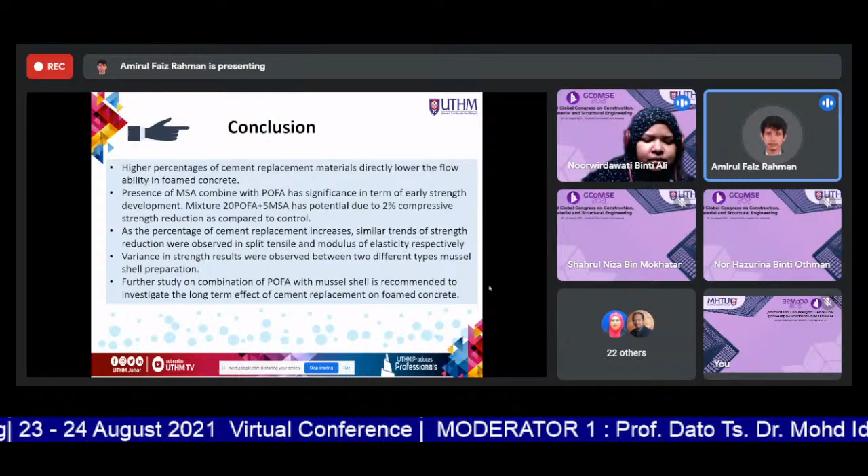I would like to open the question. Okay, thank you, Mr. Amirul. Any question from the floor?

Mr. Amirul, I'm wondering, with all of this process to produce the MSA, will it give an increment in terms of cost when we want to produce cement containing MSA later? Let's say some industries are interested in using MSA, will it give a very high increment of the cost? Because I can see that the process to produce this MSA is quite a lot, right?

Thank you for the question, Doctor. Based on the result, mainly the compressive strength shows not so much variation. However, the main concern is the reason I differentiate mussel shell preparation, due to the outer green layer of mussel shell, which is called periostracum, that might disturb as the impurities in cement materials.

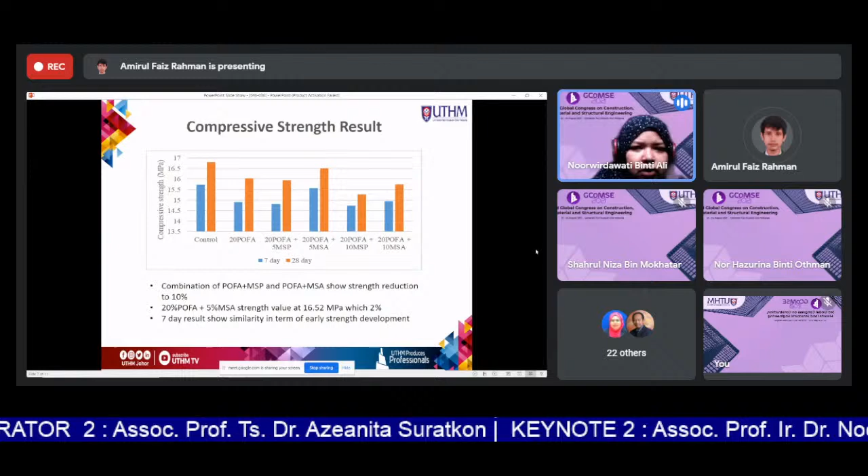Okay, all right, okay. Thank you, Mr. Amirul, for your presentation. Thank you, Doctor. There's no more question from the floor, right? Oh, Dr. Zainorizuan has a question.

Please, Doctor. Assalamualaikum and a very good afternoon. So I have one question to the presenter. Basically, for the foam concrete, because I found that your compressive strength is a little bit lower than 22 megapascal as required by EC2 to be used as the bearing structure.

I'm wondering, because you are using the water cement ratio around 0.55, my question is: is there potential to increase the compressive strength by controlling the water cement ratio, like slightly reducing it to 0.45? Even though it may affect the workability, I think we can use the superplasticizer for the increment of the flowability.

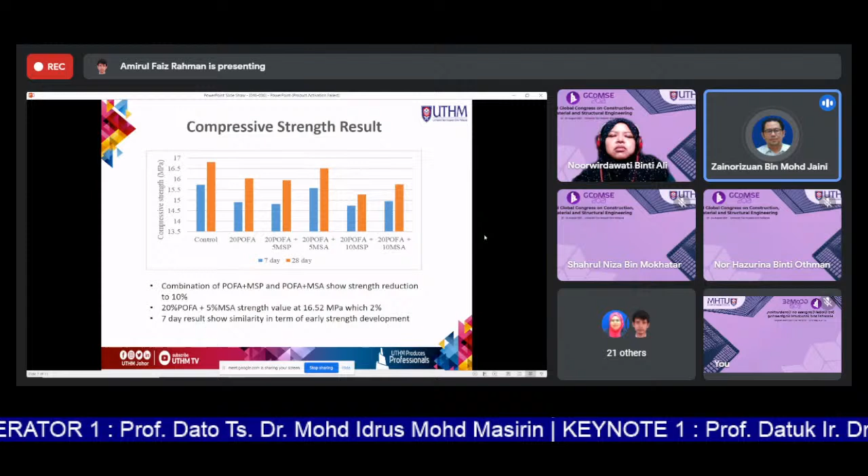And then my other question is, are there any other contributions of the POFA or the MSA toward the filling mechanism in the foam concrete? Because we know the bubble inside the foam concrete is actually affecting the compressive strength. So based on your observation, do they have any so-called contribution from the POFA or MSA that contributes as a filler as well, not just as the reaction toward the cement? So this is my question, thank you.

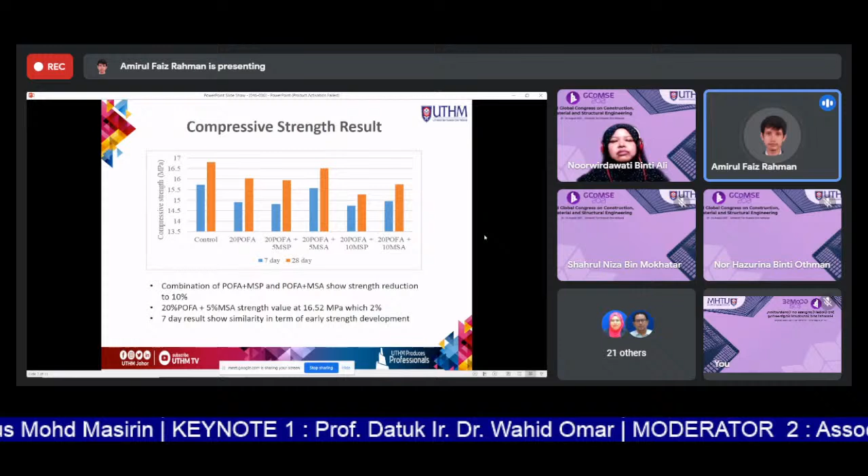For the first question: will the compressive strength increase if water cement ratio reduced to 0.45? My answer is I don't think it will increase the strength up to 22 MPa. However, if the design weight density is changed to 2000, then we can see significant increment and reduction. If we change the density weight density lower to 1500, then it will reduce significantly. In terms of water cement ratio, I don't think it will contribute that much.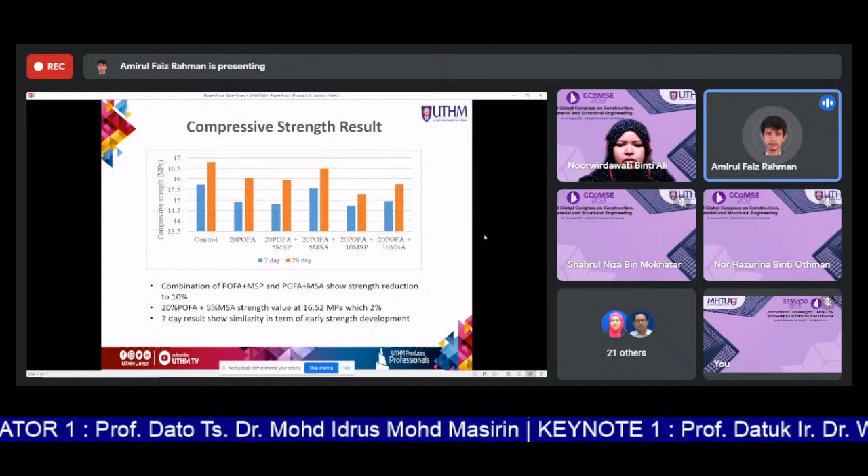Next question: does POFA and MSA contribute to the porosity in the foam concrete void? My answer is, because this study focused on preparation of materials up to 75 micron, I don't think it will contribute much towards that. However, if we change the preparation size lower to 45 micron, then we can see the filling effects. That is my answer.

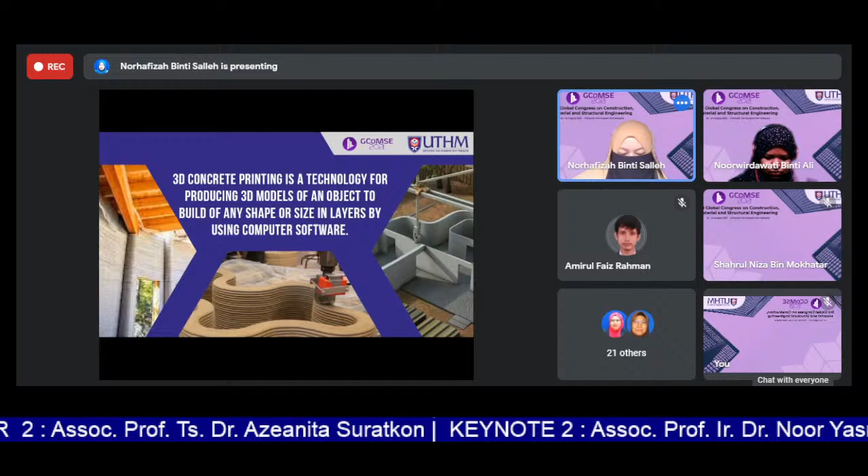3D concrete printing is a technology for producing a 3D model of an object to build of any shape or size in layers by using computer software. So we can fabricate building or construction components in completely new shapes not previously possible with traditional concrete formwork.

So the advantages of 3D concrete printing: firstly, it deposits through a 3D printer layer by layer without any formwork support and vibration process. Secondly, less labor cost in terms of manpower because we use a machine during construction, and less time of work because we can run the machine 24 hours.

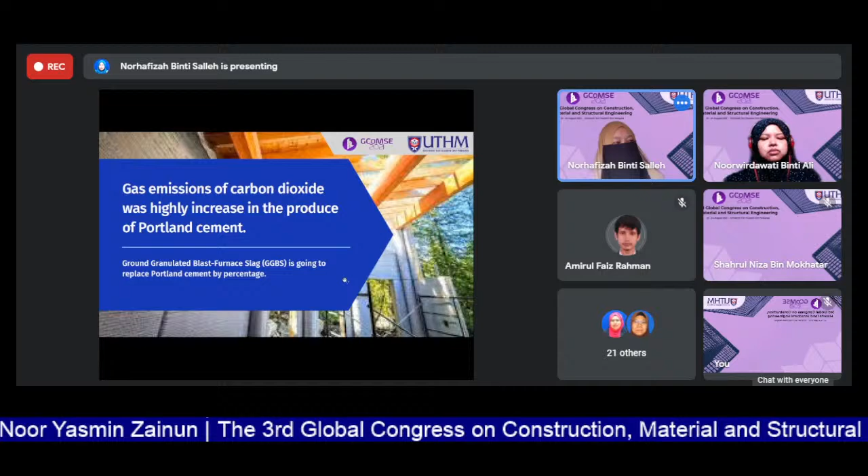3D concrete printing also uses material like regular concrete, requiring use of Portland cement as well. As we know, cement manufacturing causes gas emission production that can cause global warming. So to reduce the application of cement, we use waste material to replace the use of cement. In this review, GGBS, Ground Granulated Blast Furnace Slag, was selected to replace the cement.

This is the Ground Granulated Blast Furnace Slag or GGBS. This is a byproduct from the blast furnace used to make iron. The operation temperature is about 1500 degrees. So in the production of iron, there is a waste that produces the GGBS.

So why do we choose GGBS as a cement replacement? Because of the similarity of chemical composition of GGBS to Portland cement. Here is the chemical composition of GGBS: we have calcium oxide, silica, alumina, and magnesia, similar to the composition of Portland cement.

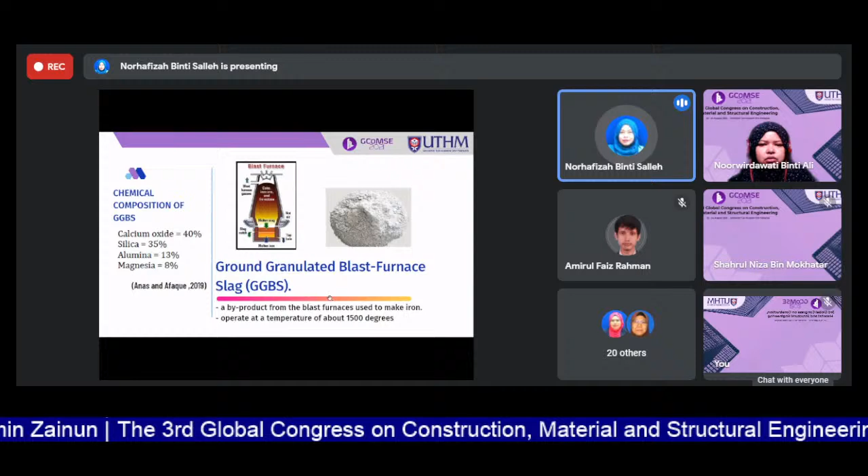Basically, in normal concrete, we just consider mechanical properties like compressive strength, flexural and tensile strength. But in 3D concrete printing, there are four main factors that we must consider, which are pumpability, extrudability, buildability, and workability.

Pumpability in concrete is maintaining initial properties under pressure, referring to stability and mobility. For printing concrete, only soft material is preferred, where the soft material is easy to pump into the nozzle. Secondly, extrudability is stated only in the fresh properties of cement mortar to quantitatively characterize the material; extrudability is purely based on flowability of printing concrete.

Third is buildability. Buildability in printing concrete refers to the quality of material used for printing. Buildability of concrete is improved by increasing the layers in concrete and also by creating a cellular type of structure. So in this part, the bonding between build layer to layer is very important.

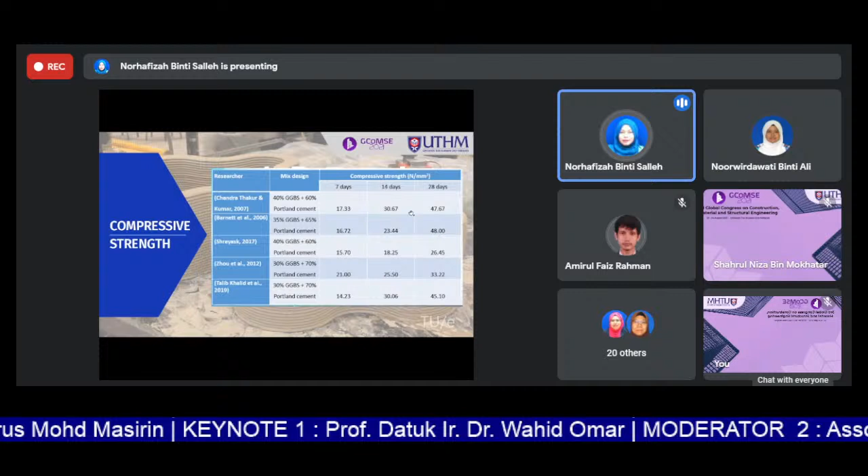So here is compressive strength data from several researchers. We can see that a combination of 40% and 60% can give us 47.67 megapascal. And roughly, a replacement between 30% to 40% can give around 26.45 to 48 megapascal strength of concrete.

This is where the researchers just replace directly without any additional fly ash or others. This is just a replacement between cement Portland and GGBS.

All right, so we go to print quality. This is very important in 3D concrete printing, as it will influence the printability and buildability of the concrete.

There are guidelines here for the characteristics of 3D printing for printability. First, we must ensure the mixture is extruded through the nozzle with good printing quality, meaning no void, no dimensional variation in the extruded material. These two items must be checked in our mix design; if either does not apply, the mix design cannot be used for concrete 3D printing.

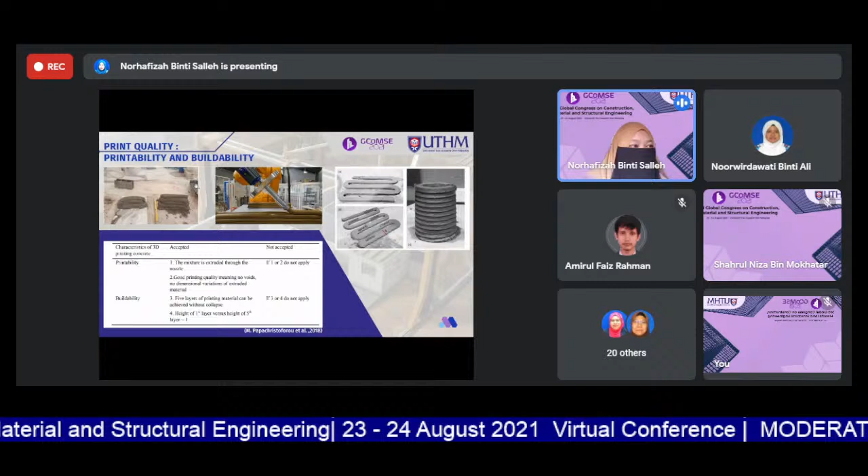And then for buildability, 5 layers of printing material can be achieved without collapse. We must make sure we can layer the concrete 5 layers without collapse.

Here you can see we have 2 specimens. The first specimen has 5 layers, but the layers collapsed, so this specimen cannot be used for 3D concrete printing.

So for buildability, the first item is that the height of the first layer versus the height of the fifth layer must be equal to 1. This is a guideline for how to measure printability and buildability of 3D concrete printing.

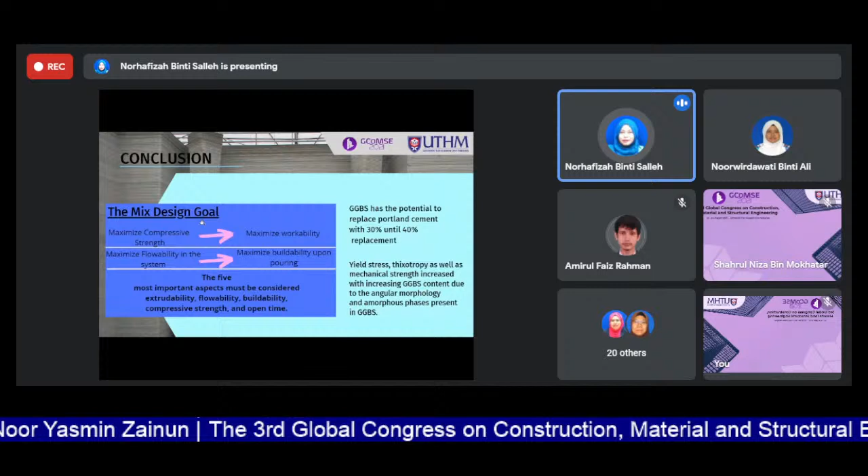2019. All right, so for the conclusion, even though we want to make a mix design, the mix design goal must first achieve maximum compressive strength, but we must consider the workability of the mix design.

And then maximum flowability in the system, to make sure the mixed design or concrete's flowability is okay. But we must also ensure maximum buildability upon pouring is also in good condition.

So there are five most important aspects that must be considered: firstly, extrudability, flowability, buildability, compressive strength, and open time.

So for GGBS, it has the potential to replace Portland cement with 30% to 40% replacement, and yield stress, thixotropy, as well as mechanical strength increase with increasing GGBS content, due to the angular morphology and amorphous phase present in GGBS. So GGBS is quite good for use in 3D concrete printing.

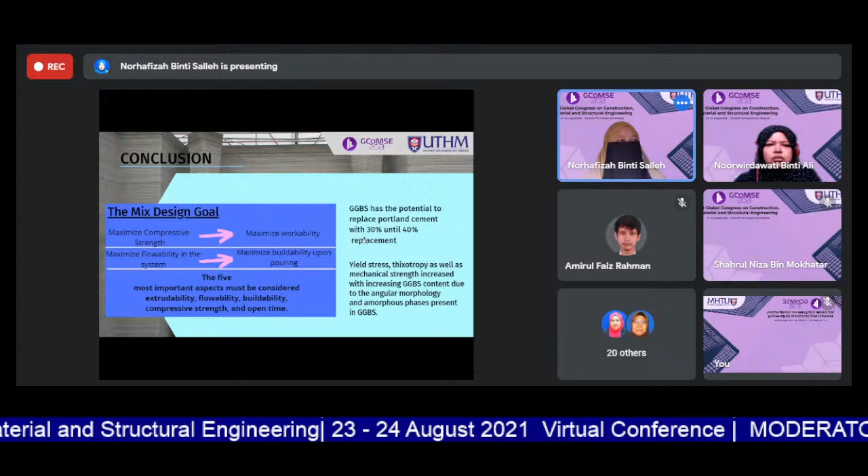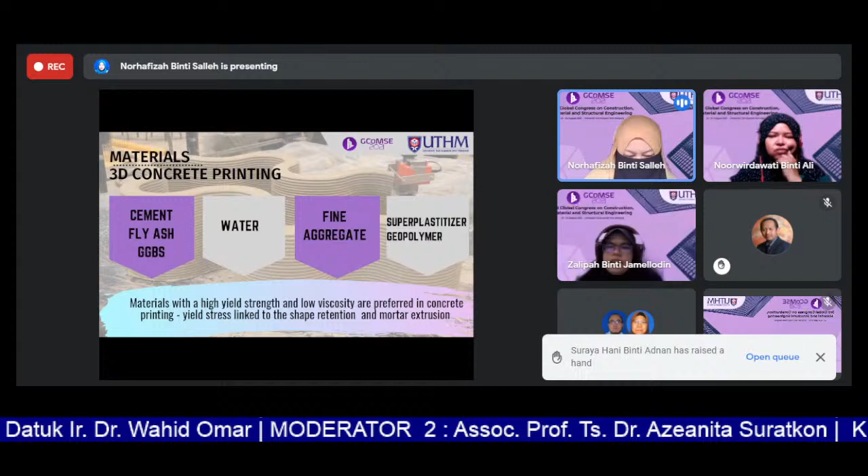Subjected to, like, our common mortar.

Okay Dr. Suraya. Thank you, Assalamualaikum Dr. Hafiza, please don't be angry at me because I asked the question. Just a simple question, maybe this thing is quite new to me, so I want to know: is this concrete printing good in terms of durability?

So for the durability, okay, because in my review I'm considering the replacement of cement. For the durability, wait, let me get the information. I'm not sure about the durability conditions, because from my research, I'm only considering the mixed design first, because this is quite new in Malaysia, because we want to produce the machine or the pump to pour the 3D concrete. I'm sorry, but for the durability I haven't found the detail of the durability of 3D concrete printing yet.

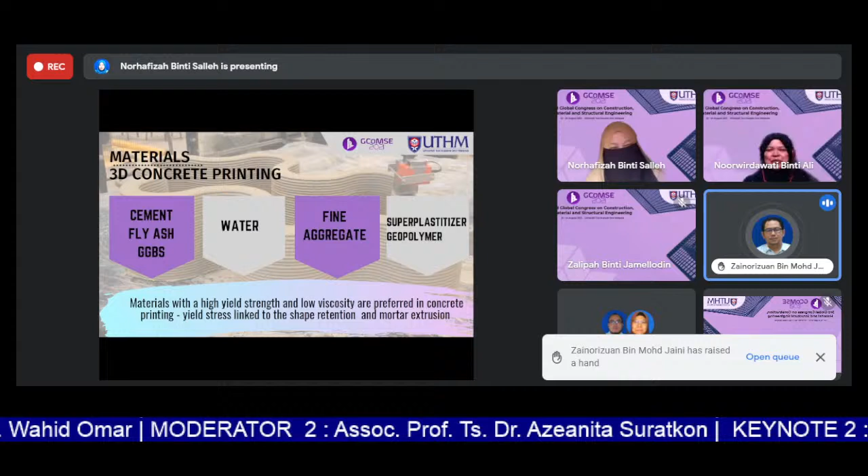Assalamualaikum warahmatullahi wabarakatuh. I have a question to our respective presenter. You have done so much regarding the strength for the 3D concrete printing. But I believe in 3D concrete printing, instead of the strength and workability, the bond between layer to layer during the printing process is also important to ensure the integrity of the building. So if we include GGBS, how about the effects on the layer of the 3D concrete printing? So this is my question. Thank you, Dr. Zainorizuan.

I cannot hear your question, apa tak dengar. Okay, we lost you a little bit. Sorry, okay.

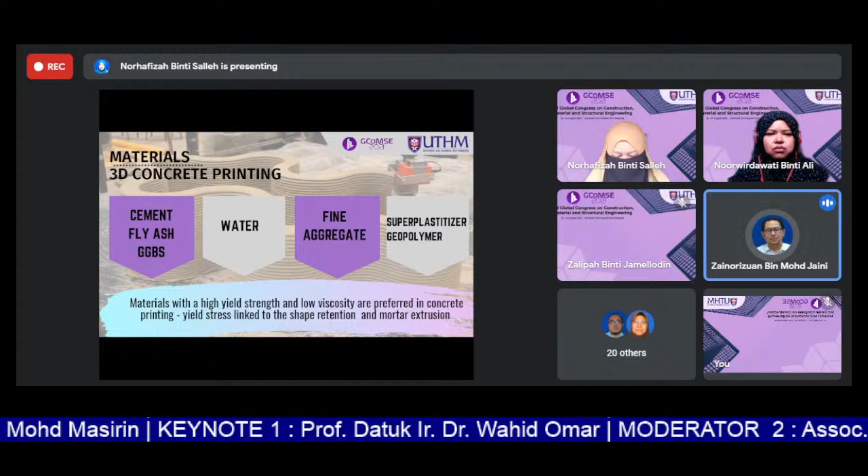I believe that for concrete 3D printing, besides the strength and workability, which are part of the requirement under code of practice, how about the bond mechanism layer to layer during the printing process to ensure the integrity of the layer for the building? If we associate a material such as GGBS, how does it affect the bond mechanism or bonding of the layer of the 3D printing concrete? So this is my question.

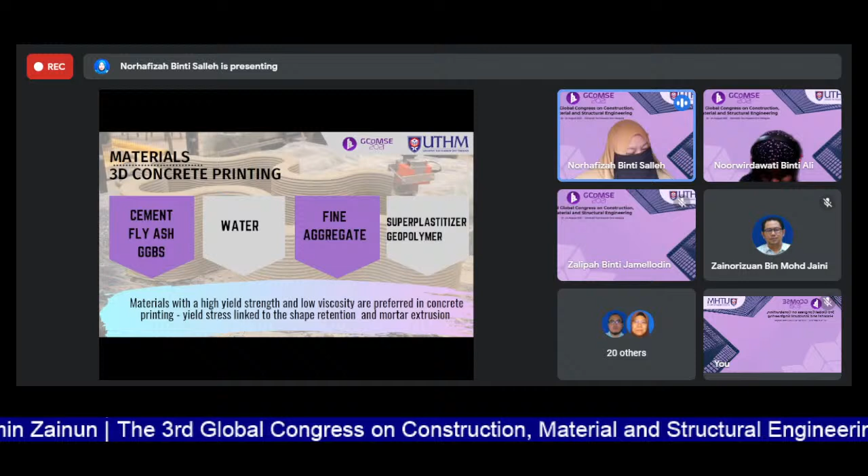All right, thank you Dr. Zainorizuan. So, we know that GGBS has a similarity of chemical composition to Portland cement, so it will have similar behavior because it's also a binder to our concrete. And for buildability, the bonding between layer to layer must be good because there is no reinforcement to build the structure. So we need good bonding between layer by layer. I think GGBS will also give the same bonding characteristic as Portland cement, because several researchers have reported that GGBS has high yield strength and high bonding between concrete to concrete, or bonding between layer to layer.

So hopefully, after this review, we are going to make an experiment for this concrete printing, and I will test the bonding characterization between layer to layer for 3D concrete printing, Inshallah. Okay, thank you for the answer, Dr. Hafizah. Do we have any other question?

Okay, so no more question. Excuse me, I just want to add something to Dr. Nur Hafiza. You mentioned that in the mix design we use superplasticizer and geopolymer. I think the information is not quite correct, because geopolymer is completely different from usual concrete. It's not an admixture. Geopolymer is a binder, same as cement. So that's the comment, not the question.

Okay, yes, thank you Amirul Faiz. So for geopolymer, there are two categories, which will influence the workability and the bonding as a binder in 3D concrete. Because in 3D concrete printing, we need to consider using the geopolymer and the superplasticizer also.